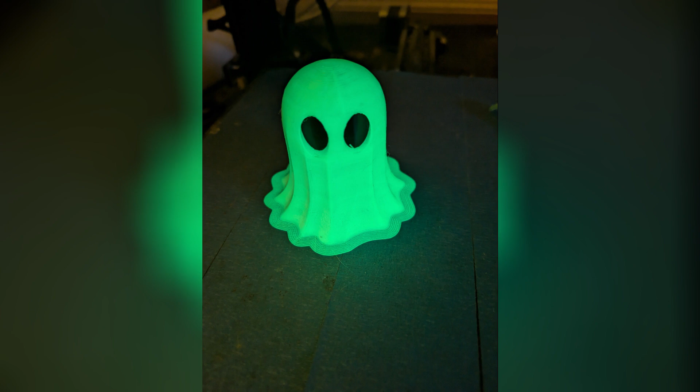Halloween is right around the corner, so it's time to break out the glow-in-the-dark filament and print a ghost. A good design for a Halloween ghost includes irregular curves and free-flowing lines blending together. I suppose if I were more of an artist I might want to sculpt that in Blender, but I'm a lot better at mechanical CAD.

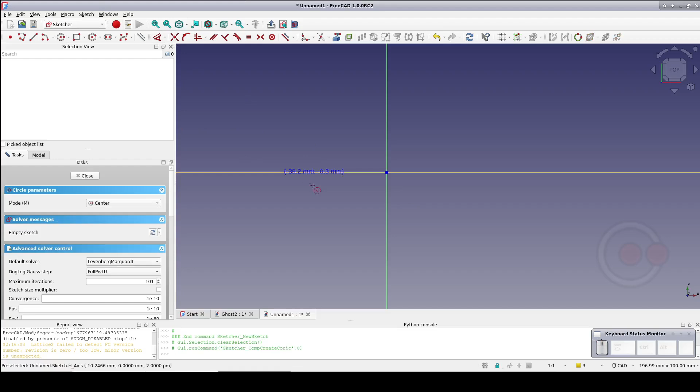So I'll start with a sketch on the XY plane. Draw two concentric circles constrained to the origin. The B-Spline is going to be drawn in between them. I want the approximate radius of the bottom edge to be 30 millimeters, so constrain the inner circle to 25 millimeters and the outer circle to 35 millimeters, giving us 30 millimeters on the average. Now select the B-Spline tool and make the starting point fixed on the Y-axis.

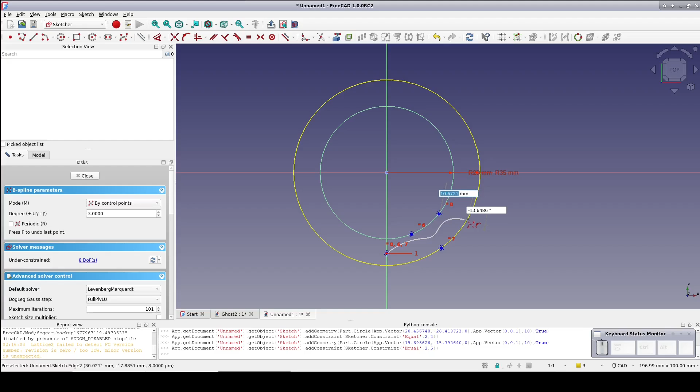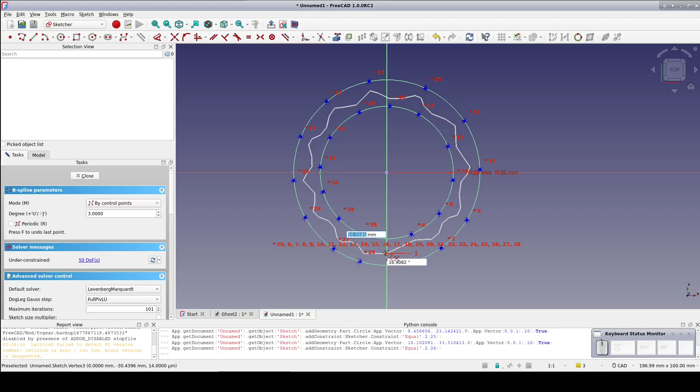Zigzag along the circles, fixing each of the control points to be on the inner and outer circles alternately. Just work all the way around the circle. Don't worry too much about the individual placement—you can always slide the control points around a little bit later. Just make sure that when you get back to the end, make the end point of the B-Spline coincident with the start point. That actually looks pretty good.

Since we don't want the guide circles to actually be part of the solid, select them both now and toggle them to construction geometry. Close the sketch. That's a good start. The objective is to create a loft that rises up and eventually closes over the top to form the old sheet with eye holes costume. This will require a little bit of additional guidance to get anything like the shape we want.

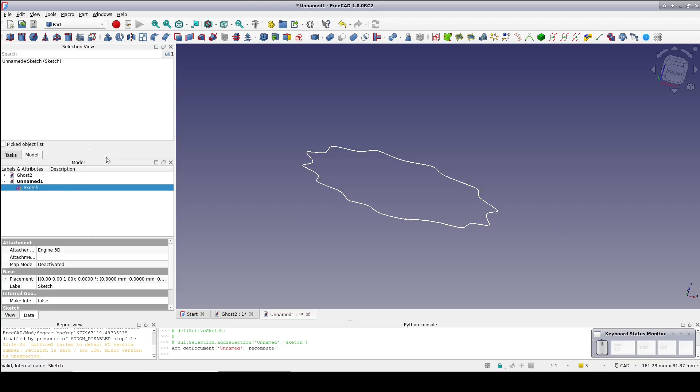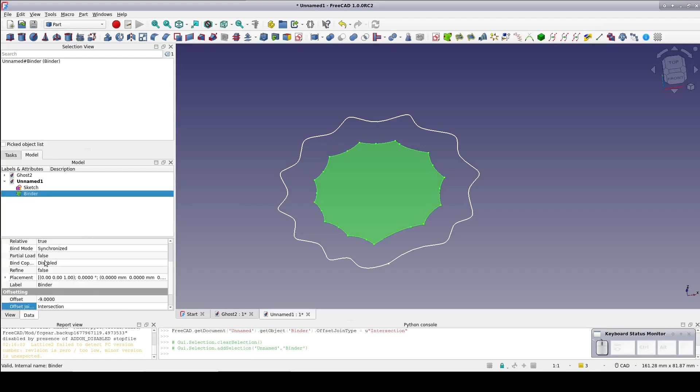Select the sketch and create a sub-object shape binder. To get a flare at the bottom, offset the shape binder to -9 millimeters. Going through the various options for how the offset is formed, there's not much difference in the look in this case, so just leave that for now. In the data pane, open the placement and go to position.z and set it to 25 millimeters.

Select the shape binder and create a sketch, using plane face as the attachment mode. Draw a circle completely inside the shape binder to be the next profile of the loft. This will guide the eventual solid to taking a more circular form so that it can close neatly over the top. Because of the way the loft curves the surfaces to match profiles, it won't result in having an awkward cylinder at the top.

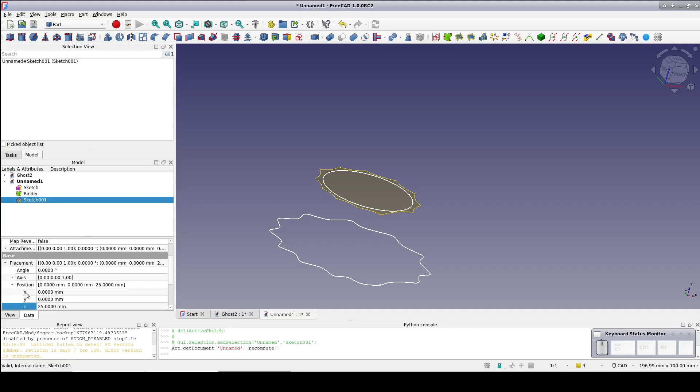It'll flow quite nicely. In the data pane for the new sketch, go to the attachment position Z and set that to 25 millimeters. Select that sketch and create a new sketch attached in the Object XY mode. Create a small circle inside. Close the sketch.

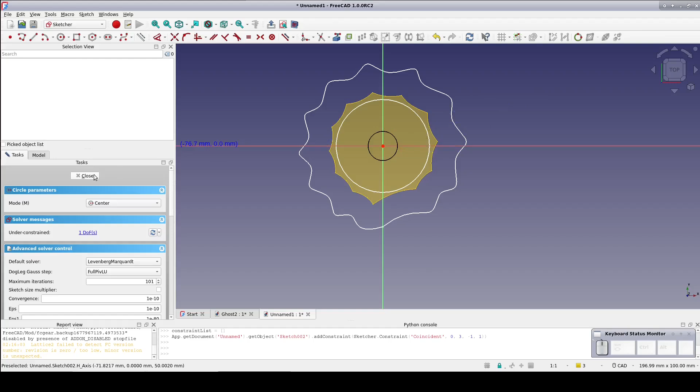In the data pane, set attachment.z to be 10 millimeters. Keeping it closer to the previous sketch gives the surface a more acute curve at the top so that it closes smoothly over as a dome. Create the loft and add the profiles in order, starting with the first sketch, then the binder, sketch 1, and sketch 2. Check Create Solid and OK.

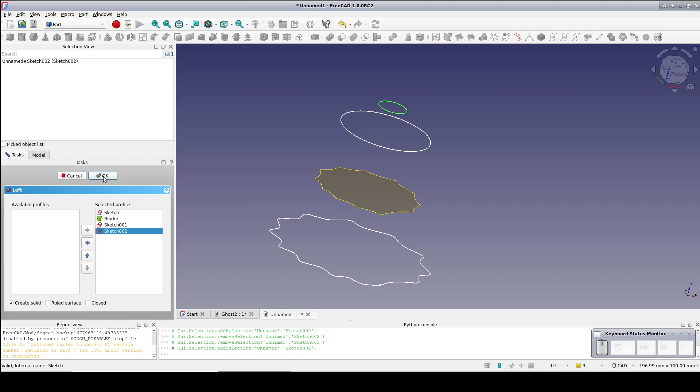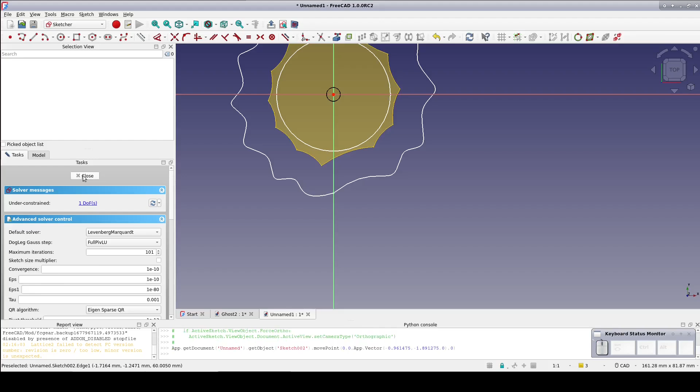Looking at the loft, we have an unfortunate flat spot at the top. Edit the sketch and reduce the size of the circle. That's looking better, but it's still a little bit too flat. Make the circle even smaller. That's looking a lot better. That little bit of flatness at the top will not even be noticeable when rendered in a solid form.

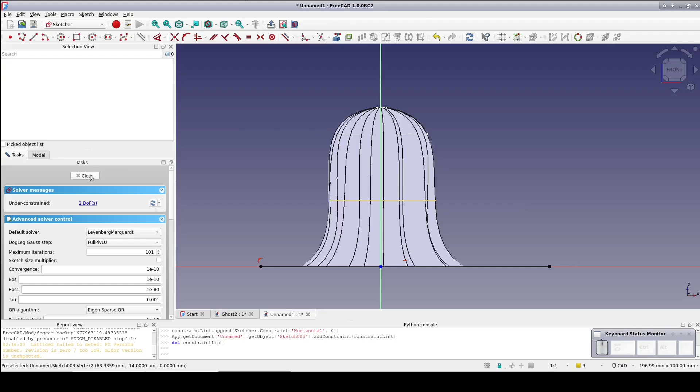Now to make a cutout for the eyes. Start with a sketch on the XZ plane. Just to get a feel for the positioning, place a line on the x-axis that extends beyond the edges of the ghost in both directions. Close that sketch and go to Placement, Position, Z. Start at 40 millimeters—it needs to be a little higher.

We just need a good center line for the eyes. It's more aesthetics than science. 43 millimeters looks good. Reopen the sketch and set the cross-section view so we can see what we're sketching.

Select the ellipse on center point tool and place an ellipse roughly where one of the eyes should be. Pull out the minor axis along the x-axis a bit, and pull the major axis a little taller along the y. Move that inward a little to make it more eccentric. I just want to get it roughed in at the moment.

I move the minor axis guide point a bit, and I see the ellipse is free to rotate. I want the minor axis to be affixed to the x-axis, so set a point on object constraint.

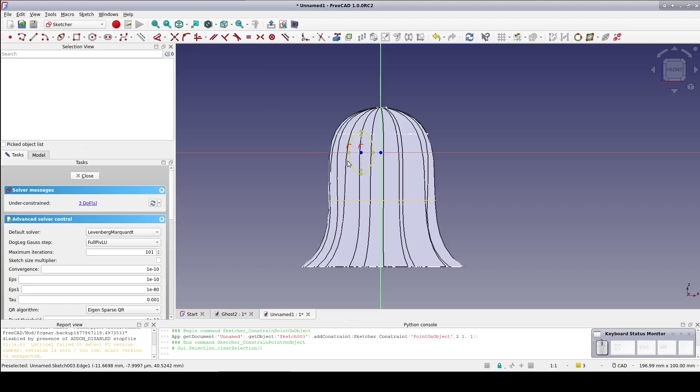You may want your eyes to actually be at an angle. If so, you can either use the angle constraint or leave it unconstrained. It's completely a matter of artistic choice.

Now create an eye on the other side. Zoom in a little so we can see what we're doing.

Now I'll constrain the major axis of each eye to be the same, and then the minor axes. You're welcome to make the eyes different sizes for your ghost if you want.

Now make the centers of the ellipses symmetrical with the origin. Move them a little closer together, and that looks pretty good.

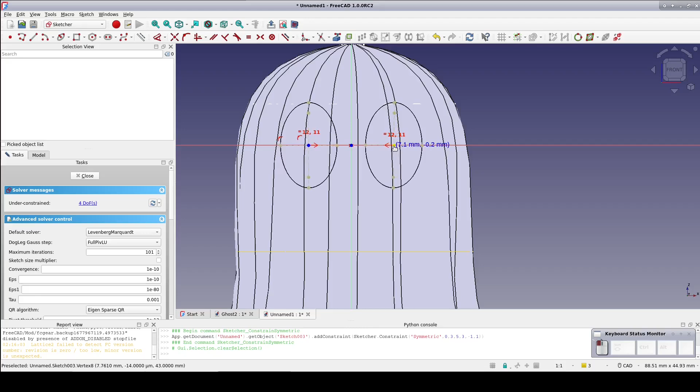Close the sketch. Before we cut out the eyes, we need to make the ghost body hollow. Otherwise, scaling the hollow core will cause distortion in the eye holes.

Select the loft and make a draft clone. Press G-R to get rid of the draft plane. As you can see, the clone exactly fills the space of the ghost body.

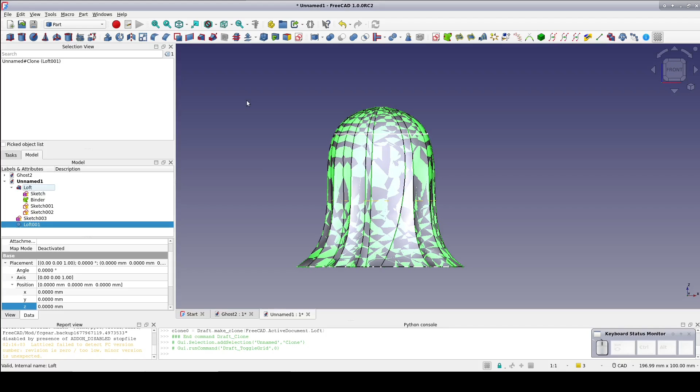Select the clone, and in the data pane set scale X and Y to 0.9.

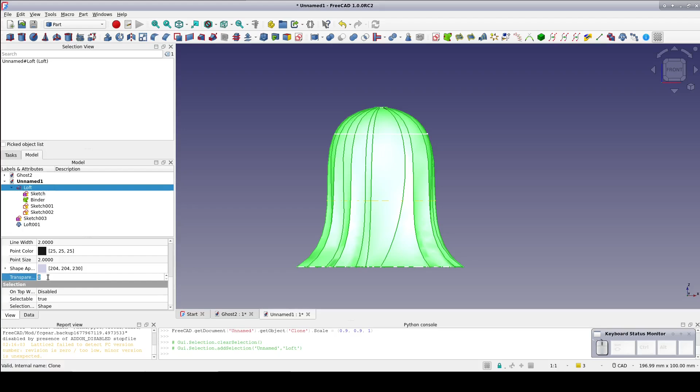To see if that looks right, select the loft and in the view pane, set the transparency to 50%. Select the clone, and we can get some idea of what the walls are going to look like.

The clone is going to be good for hollowing out the lower part of the ghost body, but we need a little more control over the top.

Create a primitive plane large enough to completely cut through the clone.

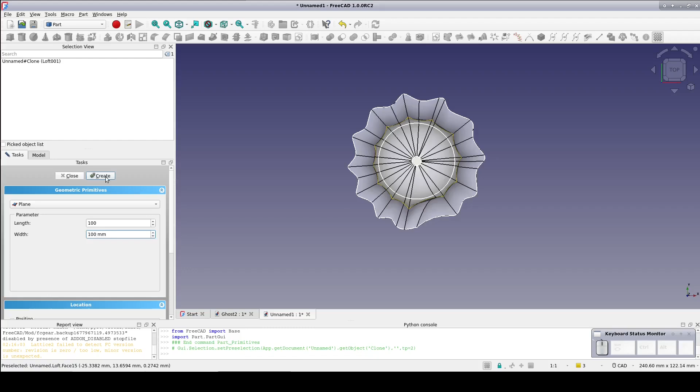Right-click the plane, select Transform and slide it into place on the XY plane. Now switch to a front view, transform the plane again, and lift it up to just a little bit below the eyes.

Select the clone, select the plane, and go to Part, Split, Slice Apart. Open up the exploded slice.

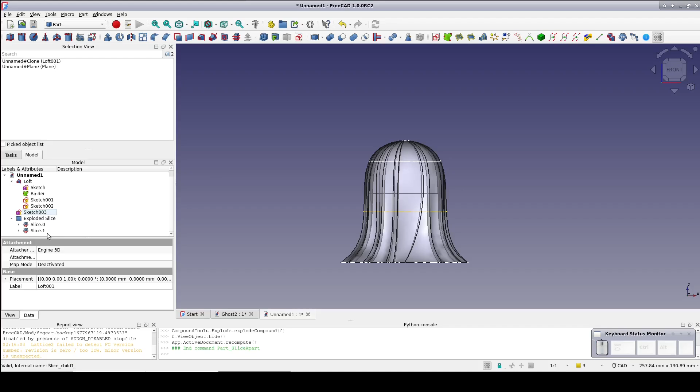It looks like Slice 0 is the one to keep, so hide Slice 1 as a reminder that that's not the one we want.

Hide the loft. Bring the view around to the top, and select the top face of Slice 0. Create a sketch on the plane face.

Create a circle centered on the origin. Bring it out so that it sits at the top of the slice.

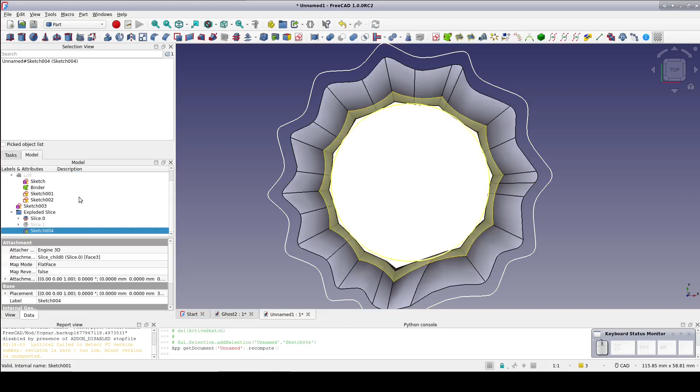Extrude it to 10 millimeters as a rough-in. The cylindrical cutout needs to accommodate a black insert that will completely cover the eyes.

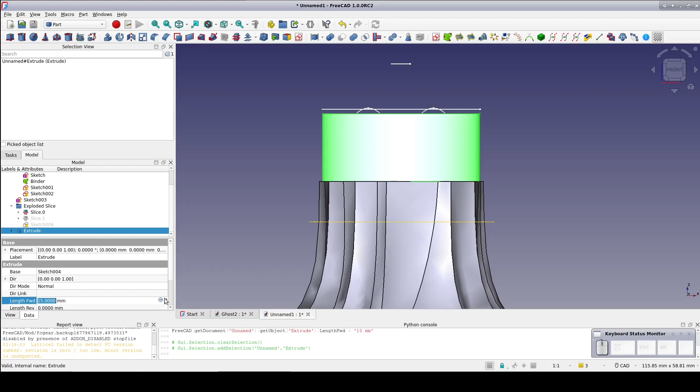Select the extrude, go into the data pane and increase the length forward until it ends up a little above the eyes. At the same time, it cannot protrude through the surface of the ghost body.

So make the loft visible again. It's quite apparent that we're going to have a bit of a problem with this.

A combination of reducing the radius of the cylinder and reducing its height just a bit will solve this. I'll start by reducing the radius a bit.

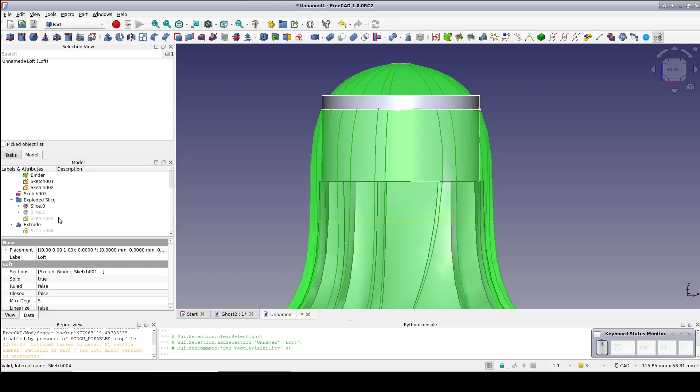Looking again shows that we're getting in the neighborhood of right, but it's still not enough. Reduce the height of the extrusion to 17 millimeters. That actually looks pretty good.

The number of entities we're keeping track of is increasing quickly. Renaming a few things will make it easier. Rename Sketch 3 to EyeSketch.

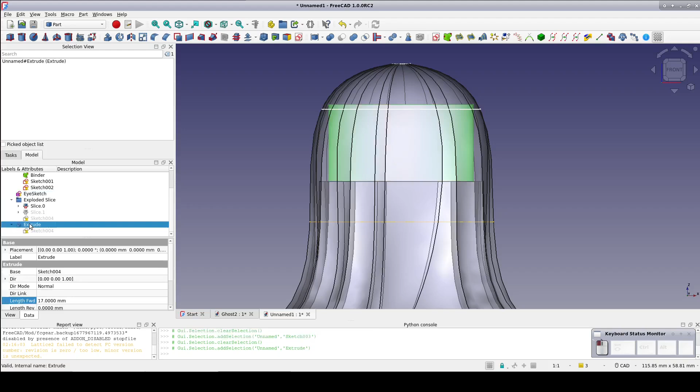To make the hollowed out core, select Slice 0 from the exploded slice and the extrude we just made, and fuse. I'll rename that fusion to core.

Select the loft, select the core, and cut. Now the ghost is hollow.

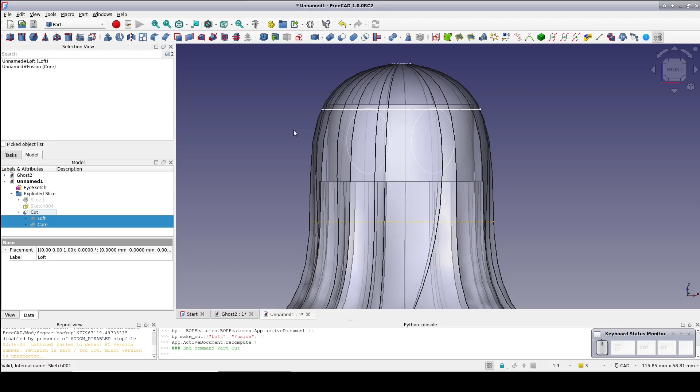I'll just rotate it around a little bit and have a look inside, make sure it's what we want. It does appear to be good.

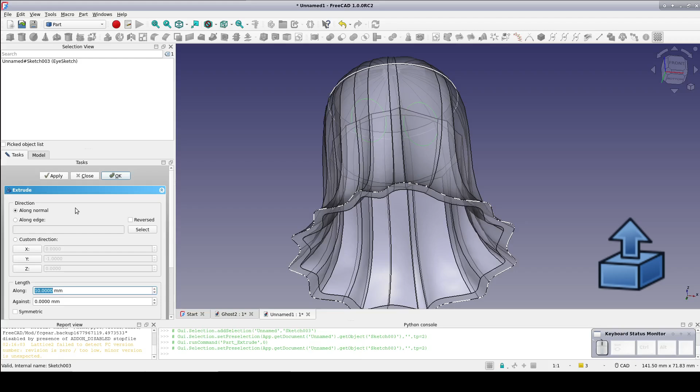Now to get back to the eyes. As you can see, the eye sketch is situated in the middle of the ghost body, which is fine. Select it and extrude to 80 millimeters or so to make sure that it protrudes completely through the front.

Clearly 80 millimeters was quite enough, so select the ghost, select the extrude, and cut. I'm going to set the transparency back to 0 just to make it a little easier to visualize.

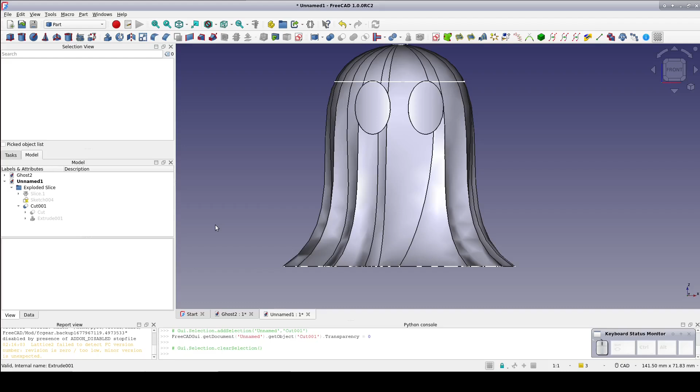I've renamed Cut 001 between the hollowed out ghost and the eye tool to Ghost just to keep things straight. It can sometimes be very useful to look at your designs in a slicer. Select the ghost and export as ghost.step. Take the defaults. Load up Prusa Slicer and import the step file. It actually looks pretty good.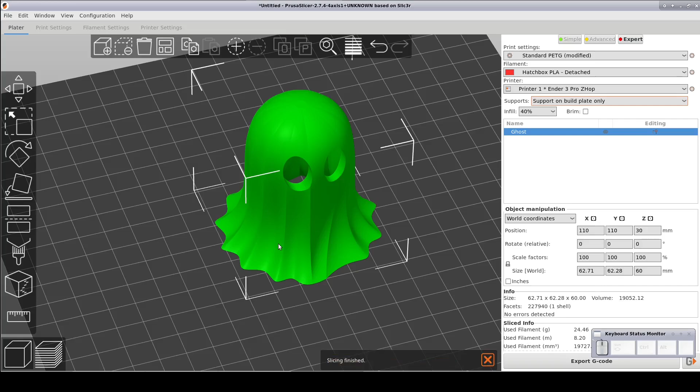Let's look with the sliced preview. We have support on the build plate, and I've selected organic supports. Look down through the slices. I see we have some organic supports on the top of the eye holes. That's not surprising, but we seem to have an awful lot of organic supports all around the inside of the body.

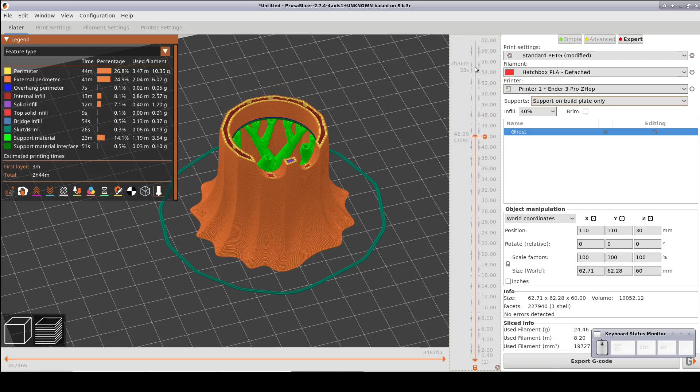Moving down further, this is exactly at the point where the core transitions from slice 0 to a cylindrical extrusion. That's left a fair bit of material that has to be supported just outside of the cylinder, but it can't be bridged because there's a giant hole in the middle. That's hardly the end of the world, but even with the organic supports, it represents extra time to print and extra materials, and there's no need for it.

Instead, go back into FreeCAD and create a 0.2 millimeter sacrificial layer closing off the bottom of the cylinder, so the slicer can simply bridge across the top. When the print is complete, I can use a modeling knife and perhaps a sanding drum on a rotary tool to cut away the thin sacrificial layer.

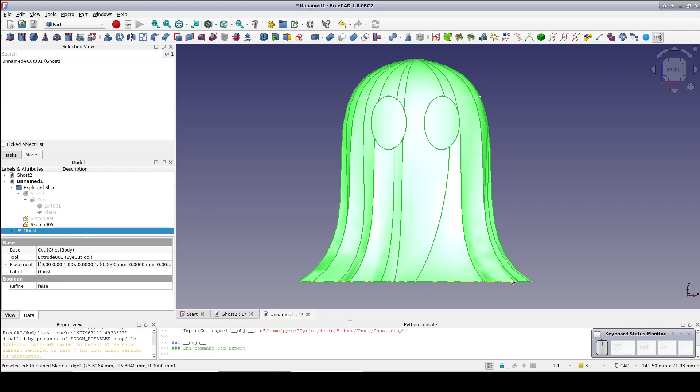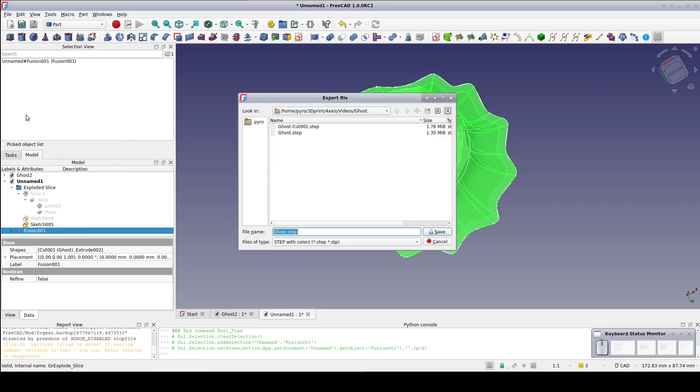Select the opening to the cylindrical cutout. Create a binder and extrude that binder to 0.2 millimeters, the layer height I intend to print at. Select the new extrusion, select the ghost, and fuse. Now select the fusion and re-export it as ghost.step. Accept the defaults as usual.

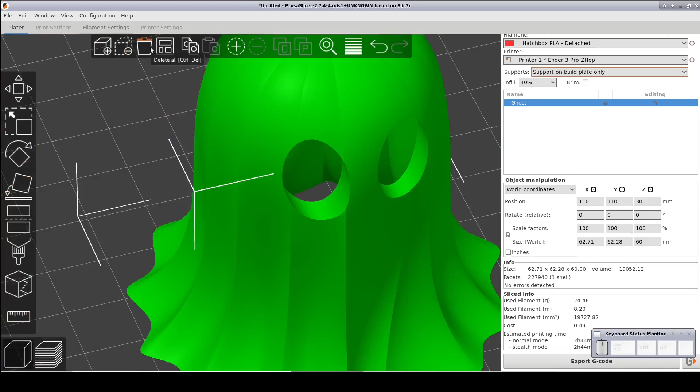Back to Prusa Slicer. For some reason, sometimes the slicer will simply reload the step file. In other cases, it refuses. This is one of those, probably because the top-level object is named Fusion rather than Ghost. So I'll just delete it and reload the step file. Back over to the slice view, conveniently right where it left off.

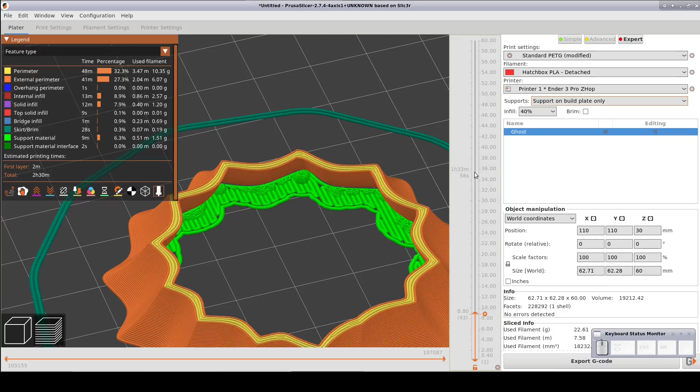It shows that we are now bridging across the entire body rather than relying on organic supports. The supports for the tops of the eyes have moved to the outside, and we have just a little bit of support down at the base where we're flaring inward sharply. That's fine.

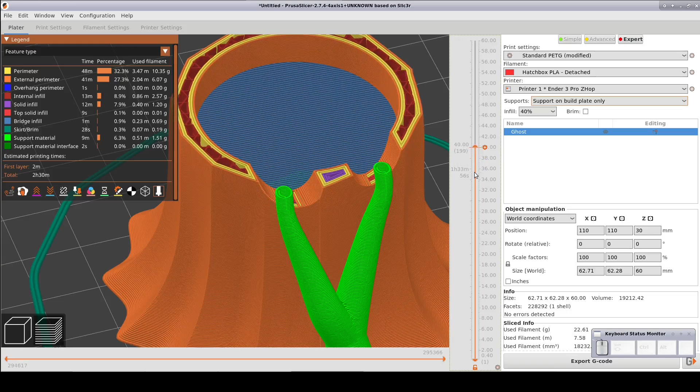Step through the model a little bit to get some idea of how it's going to go. You can see here where the thickness of the body is being laid over the bridge along with the perimeter of the hollow cylinder inside. It looks like the eye holes will form pretty cleanly with only a little contact with the organic supports at the top. The infill looks pretty reasonable. The print is going to take about 2.5 hours on the venerable Ender 3.

The design is looking really good, but you can see the inside of the print through the eye holes. While in many cases that might not matter much, here the intention is to print it in glow-in-the-dark filament. There's reason to be concerned that if the light is shining through the eye holes as well, the eyes really won't be visible at all, ruining the effect. To avoid that, we need a black insert that can slide into the cylindrical space behind the eyes so that none of the glowing effect will shine out.

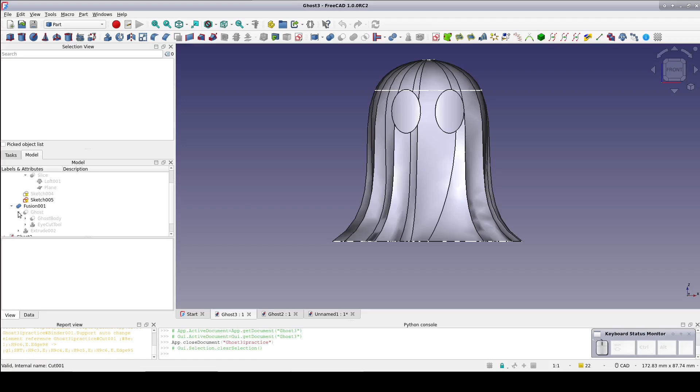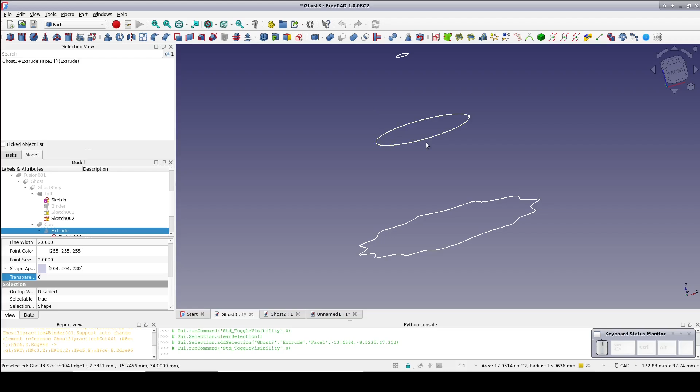In order to get the size right, I'll make that insert in reference to the sketch that makes the cylinder and the core. To avoid confusion, hide away the ghost and any extraneous sketches that could be mistaken for the core cylinder sketch. Now select the core cylinder sketch and create a new sketch. Attachment mode concentric. We need 2 circles to specify the inner and outer wall of the shade.

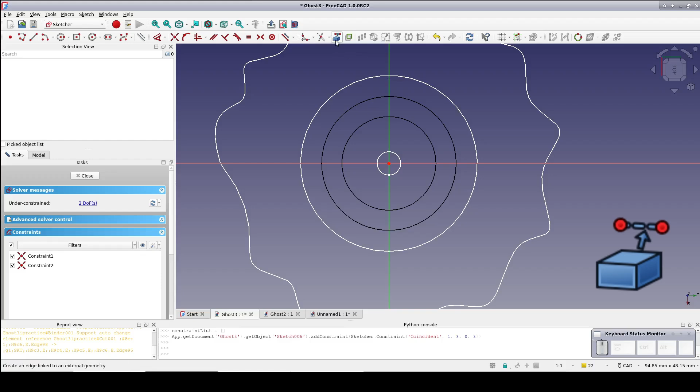Bring in the circle that formed the cylindrical extrusion as external geometry. Select the external geometry circle and the outer circle of the sketch. It may be easier to select the external circle from the geometry listing in the left-hand panel. Now click the multi-dimension tool and select an offset. 0.2 mm should be good, depending on your printer and how tightly you want it to fit.

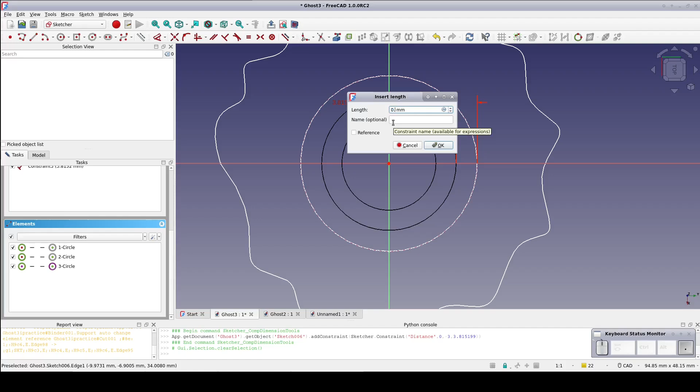Notably, when cleaning up my print later, there was a bit of persistent burr that kept it from fitting properly. I ended up solving that by cutting through the back of the ring to allow me to compress it into place. That worked just fine, so this really isn't that tricky. Now select the inner circle and the outer circle and set an offset of 1 mm.

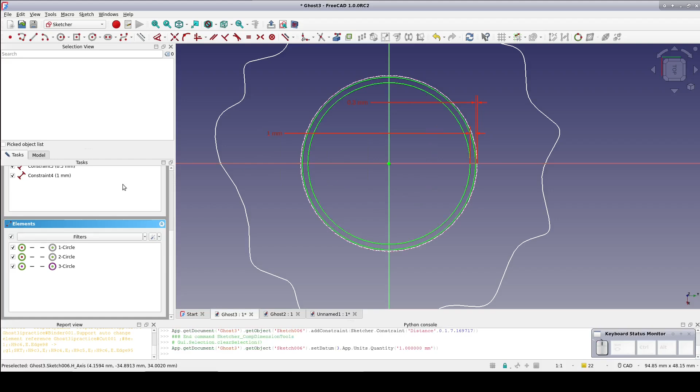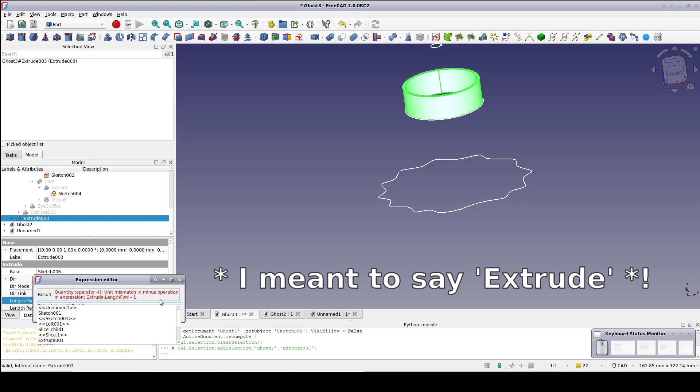Close the sketch. Select the newly created sketch and extrude it to 10 mm to rough it in. Select the extrusion and in the data pane set a formula of the length forward to Extrude.LengthFwd minus 1 mm. Extrude is the actual name of the cylindrical extrusion that formed the core, not just a description. That gives us a little tolerance to deal with possible sag in the bridge over the top of the core

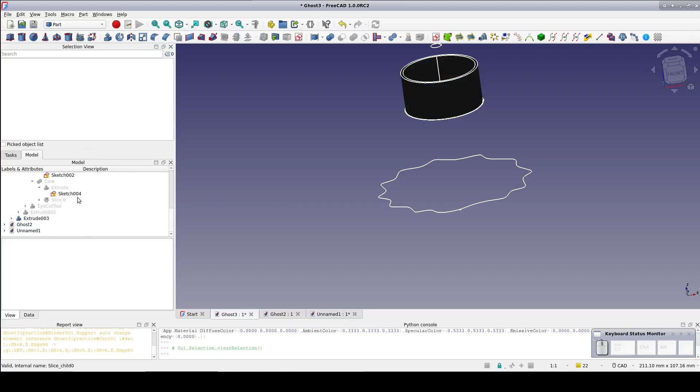cylinder. Select that newly created cylinder and in the view pane, in Shape Appearance, set it to black to help visualize the final result. Now make the ghost visible again. Zooming in, it looks like the very top of the eye holes might not be completely covered. It probably wouldn't make much difference in the actual physical assembly. The black cylinder would probably fit up far enough to cover that over.

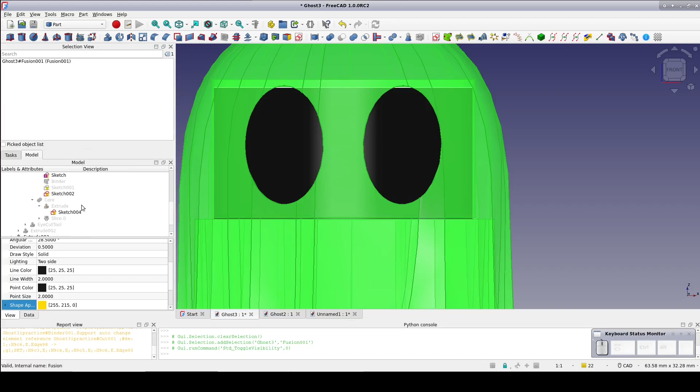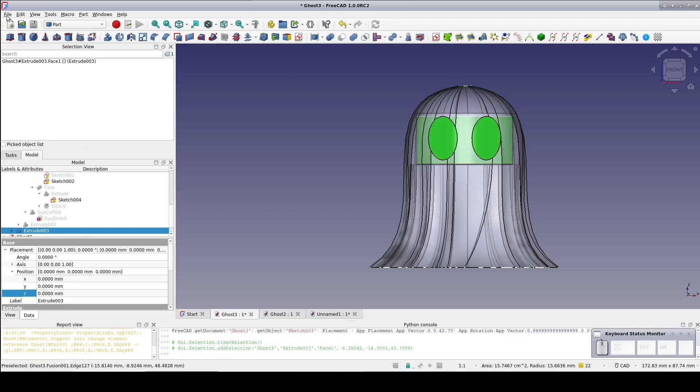But just to be absolutely sure, select the eye sketch and go into Placement Position.Z and move it down from 43 mm to 42.75 mm. It's not going to make much difference to the appearance of the model, but it does bring the top of the eye holes down just far enough to be safely backed by the black cylinder. Now to slice and print. Select Extrude003 and export as Ghost-Eyeshade.step.

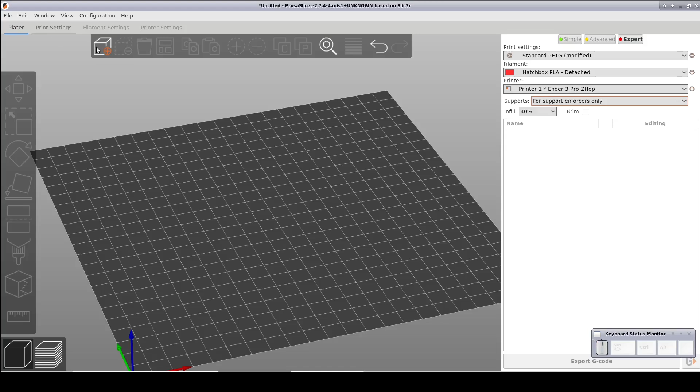There's not really much to say about printing it. It's just a simple small ring. I printed mine in black PLA mostly because I had a lot of it left over and it's not going to be exposed to a lot of heat. Just a small reminder, if you're using my patched PrusaSlicer, when it's imported it will be floating well over the top of the print bed, just because objects in the STEP file maintain their offset from the origin that they have in CAD.

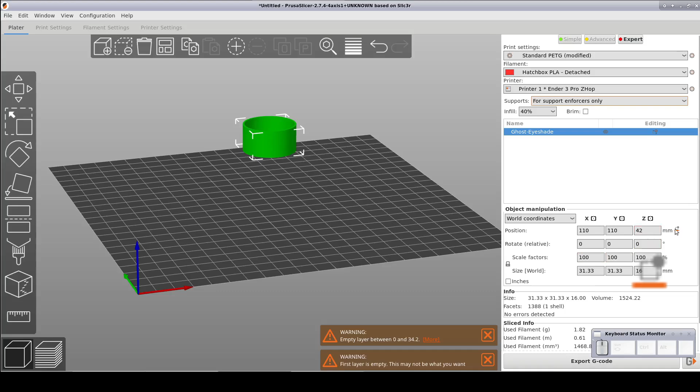Amusingly, and to the slicer's credit, it will actually build supports to print it at that height. Just click the icon to the right of the object to drop it down onto the bed. I would print it with a brim since it's just a small cylinder with 1 mm walls. There's not much adhesion to be had otherwise. As for the ghost itself, I'm using CC3D glow-in-the-dark green PETG filament. So I just picked filament settings appropriate to PETG.

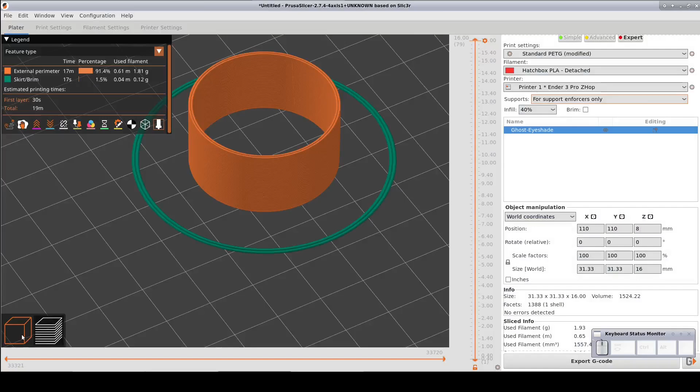I should note that glow-in-the-dark filament is extremely abrasive and you will need a hardened nozzle to print it. The substance that glows in the dark is in the form of small particles, and apparently those particles are harder than brass but softer than hardened steel. If you attempt to print with a brass nozzle, it will probably erode away before the print is even finished. I'm using a hardened steel nozzle on my printer and found that I need to print just a little bit hotter than I would with a brass nozzle to make it work.

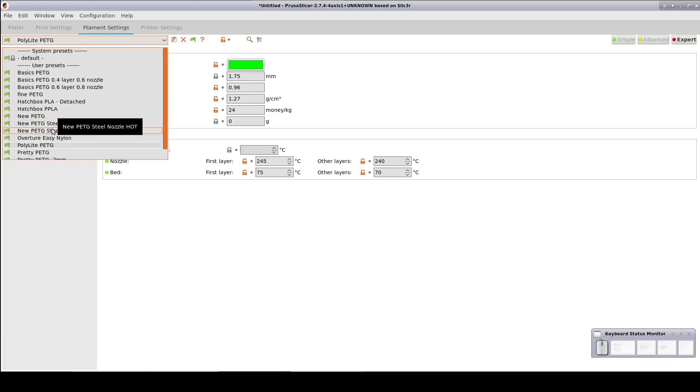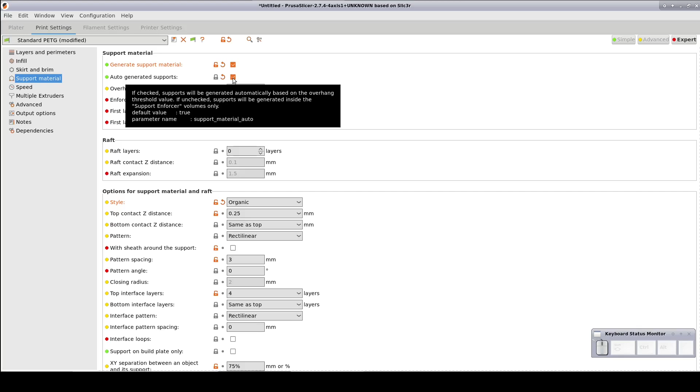The filament manufacturer recommends 240 degrees plus or minus 5 degrees, but I got excellent results printing the first layer at 255 degrees and the rest at 250. Bed heated to 70. It's worth noting that those temperatures are just a little bit too hot for a PTFE-lined heat break. I know Capricorn suggests you can go hotter, but honestly even 240 degrees Celsius is pushing it for any PTFE. The Bowden tube that comes with the Ender 3 probably shouldn't be used any hotter than 210.

A good bimetal heat break is inexpensive, easy to install, trouble-free to use, and will let you confidently print much hotter when you need to. Even with the stock thermistor, you can print a nice PA6 nylon at 275. The printing itself was uneventful other than being able to see it unusually well because it actually glowed. But the results were quite nice.

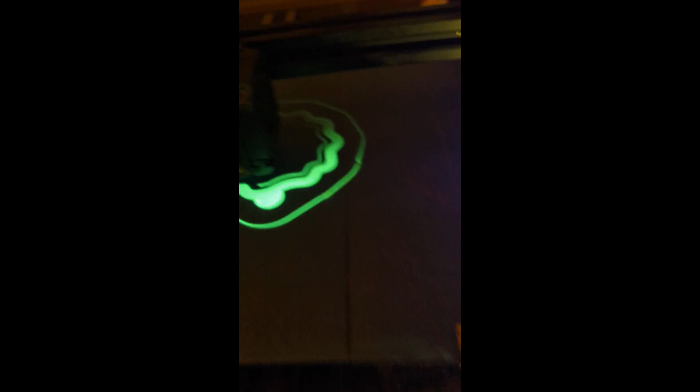As it turned out, 0.2 millimeters was not enough clearance to get the black cylinder behind the eyes, but all I had to do is take the cutters that came with the printer and cut through the back of the ring. That allowed me to push it a little smaller and slide it in. I believe it'll hold under its own force, but if necessary, a drop of glue will take care of it.

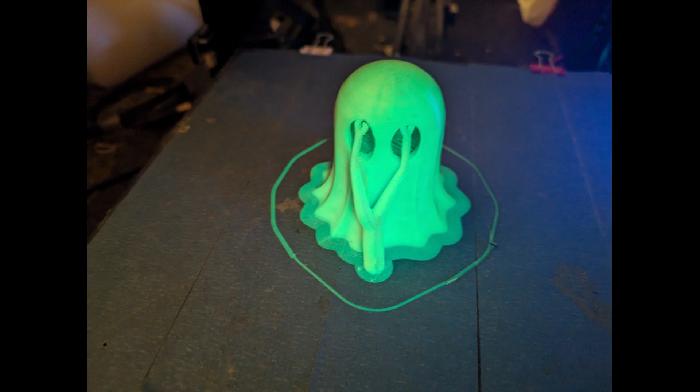So if you need something other than candy to hand out for Halloween, or need a few extra decorations, or just wanted an excuse to use glow-in-the-dark filament, this is the time.